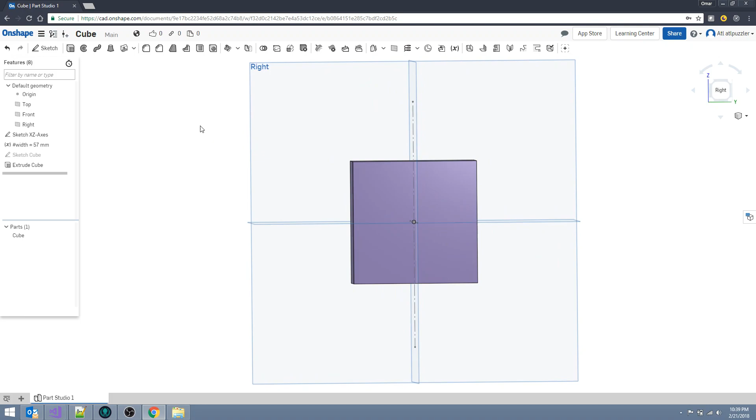In this part, we're going to be designing what's called a slicing profile, a cutting profile basically. We're going to sketch it and turn it into a surface that we can use to divvy up this cube into smaller pieces. It's going to be hard to understand without showing you, so let's dive right into it.

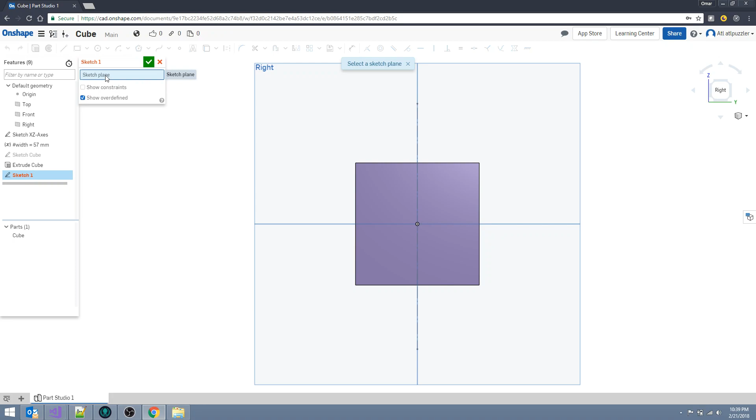So here I'm going to click Sketch, and in the wizard here, Sketch plane, let's choose the right plane. We're going to be sketching here where it says Sketch 1, and I like to edit the name and call it Sketch Cutting Profile.

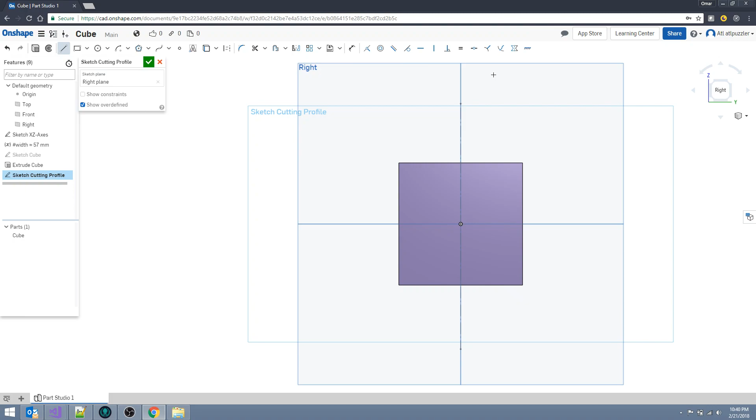To get started, let's click on this icon, the line icon. You can press L. Right around this area to the right of the y-axis, or technically the z-axis, single click and drag down around a few millimeters inside of the cube and click again. Now press escape. So we made one line, one vertical line.

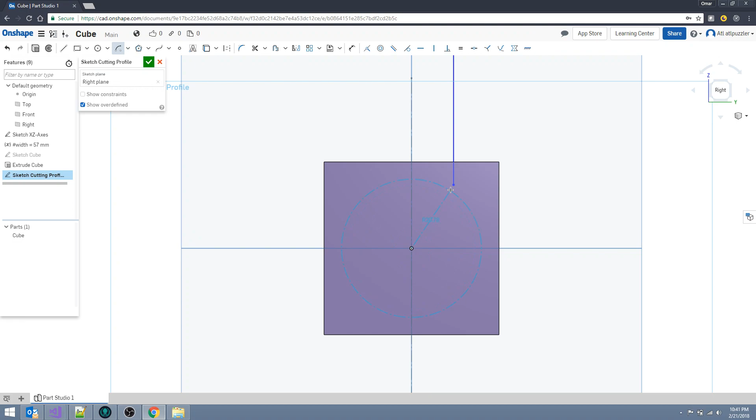The next thing we're going to do is two arcs. We're going to do a total of 3 lines and 3 arcs. Click here at the drop down with the arc icon and make sure you have center point arc. Click in the origin until you see this icon, single click and drag until you attach to this point, single click again, and drag to the right until you have around that much, single click again. Now we have a little arc.

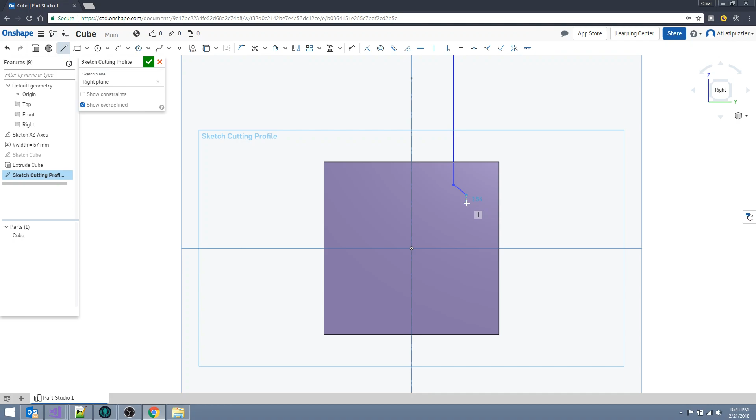Okay, now let's do one more line. Click on the line icon and start from this point here. Single click and drag a small line around a few millimeters, single click again, press escape. I'm going to zoom in here so you can see better.

Let's go back to center point arc. Click at the origin, click at this point, and now let's go back in the opposite direction past that vertical line that we drew in the beginning. So you want to go to the left of this line.

Let's go back to doing a line. Start from this point and draw a vertical line downwards. Make sure it's vertical, click, then press escape. Let's do one more last arc from the origin to this point. We're gonna go all the way to the x-axis, and you should end up with a shape like this.

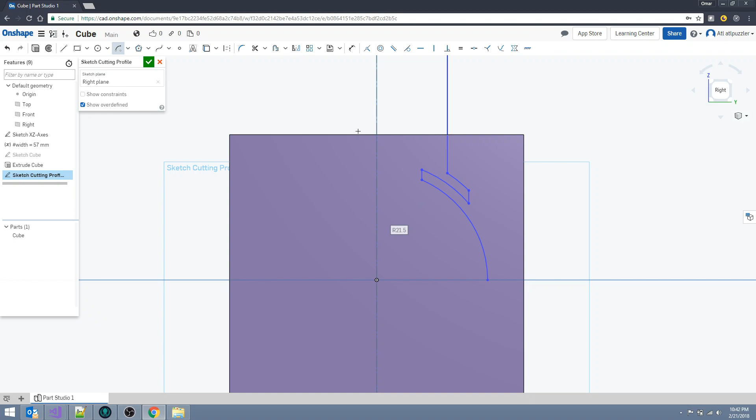Now you might wonder why are we doing this, and what is this shape, and why does it look this way? We're going to clean it up and fix it up, but let me show you why we're doing this. Just for the sake of demo, I'm going to create a new tab here, Part Studio.

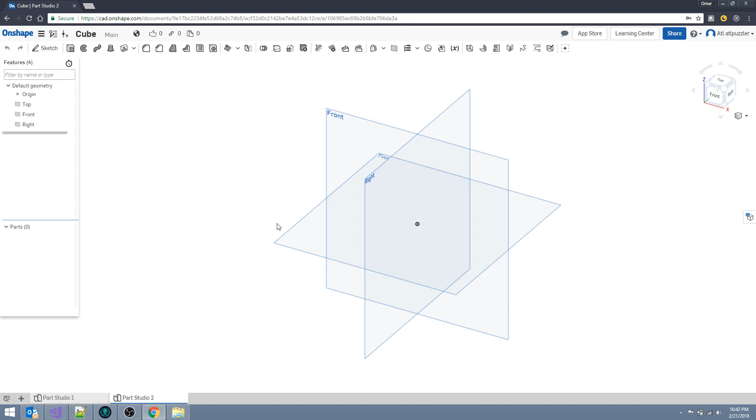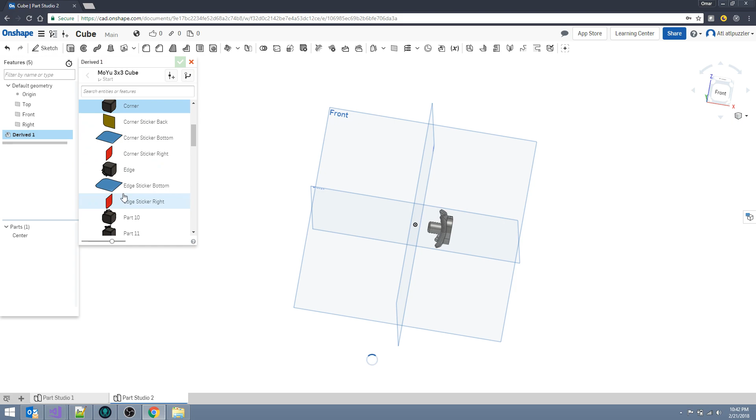This is just a clean area, and I'm going to click the derived icon here to import parts that I already have. This is from my current document where you and I are looking at. I'm going to go to other documents, and choose one of my cubes here, and choose some pieces like a corner and an edge, and click OK.

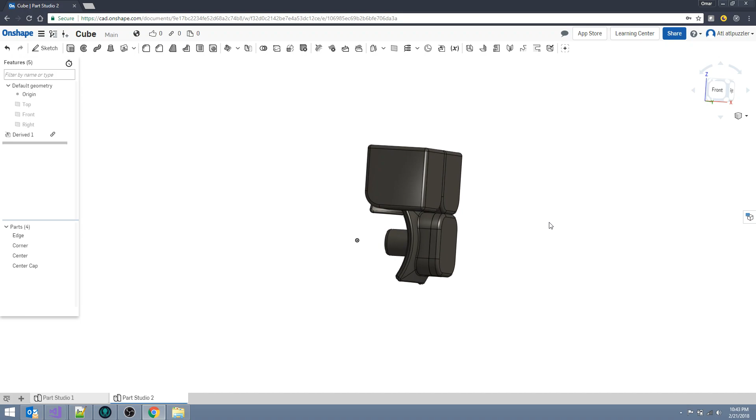Let me go ahead and hide these superfluous planes, and I'm going to zoom in. If you look on this side of the center piece, let me hide these parts here. Okay, and let's rotate this.

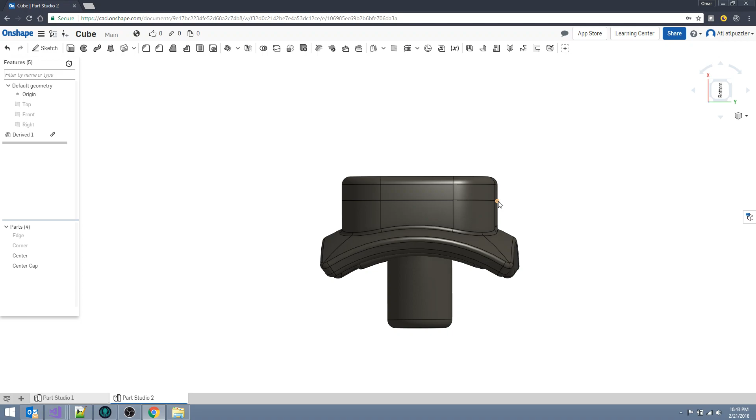If you look at this center piece of the cube, how this is a straight line here, it comes down vertically, and then it sticks out by some distance to the side, and then it goes straight down again, and then it goes back like we did, and then it comes down again, and then it comes back as an arc. So this is what we're trying to design here. This is the cutting profile that we were talking about.

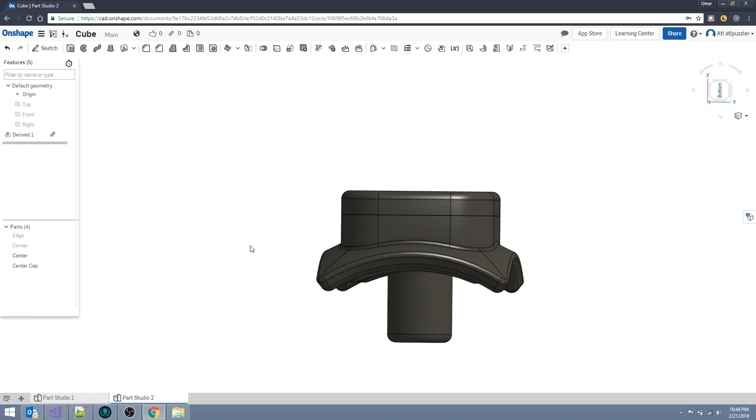So this is why we have a line coming down, and this is what sticks out and goes back to design that particular piece over here. And once you cut it, if you look at the edge and how the edge interlocks with it, it forms this shape called, I think they call it, torpedo.

Let's hide the center here. It looks - and the cap, it's going to look something like this ultimately. But I'm not trying to jump ahead here, so let's go back.

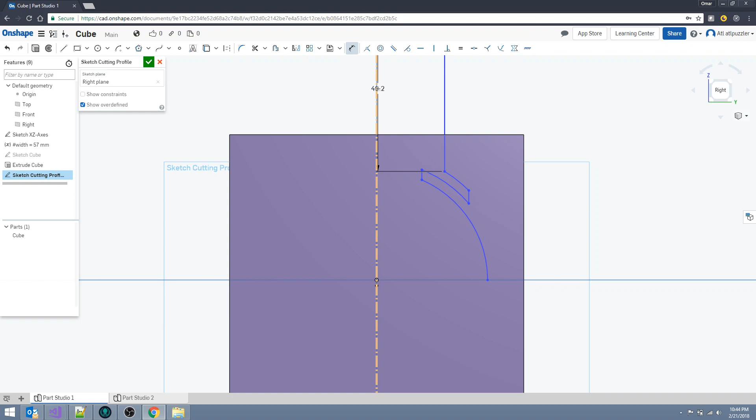Now we want to add some measurements and constraints. Click on this dimension icon, click on this vertical line, then click again on the vertical axes and type.

9.5. Typically I derive these from the width here. It's the sixth of the width because 9.5 is half of the center layer, so this will be 19 millimeters for the cube, for the corner.

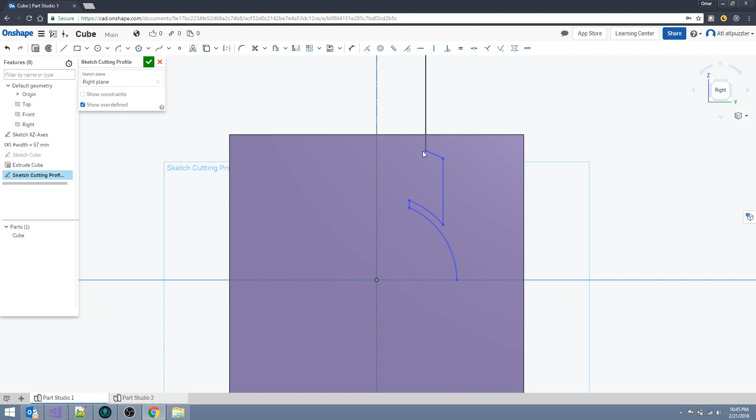Okay, so this is 9.5, and then next drag this point up somewhere around here, and we want to click on the dimension again, select this point, and then click on this edge of the cube.

We want this - depending on how deep you want to cut, it's up to you, it's a matter of taste. Let's make it 5 millimeters, and we can adjust it later. Then click again on this arc.

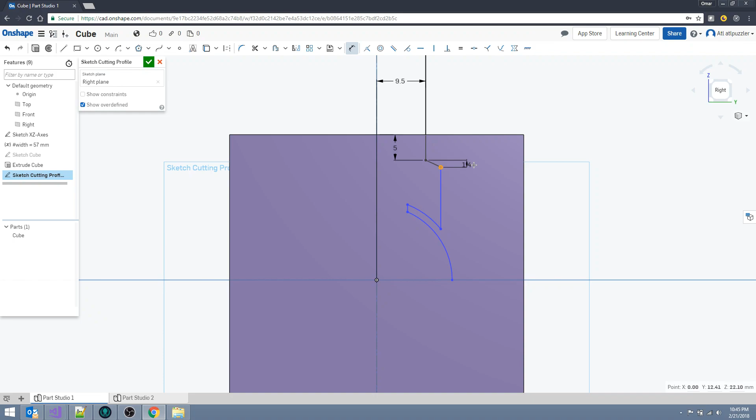Actually, click on this point and then this point, and let's make it 2.5. I think that's enough for an edge.

For this right here, let's make it also 2.5 millimeters thick, maybe actually 2. I like it thin, but it's up to you. You can adjust that to your taste.

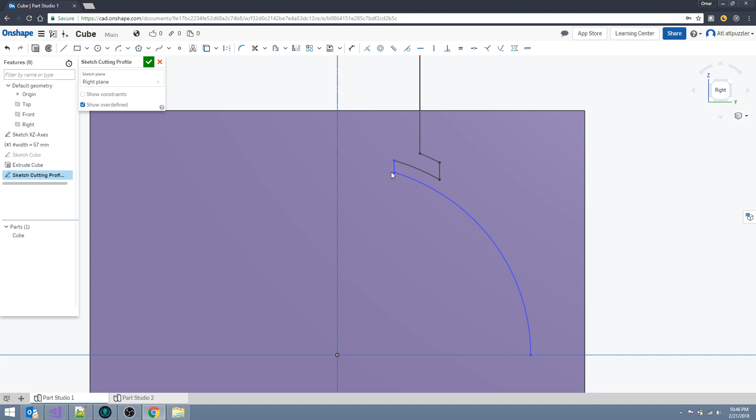Now I'm going to press escape, and I'm going to extend this edge inwards like we talked about, and click on the dimension again, choose these 2 points, and let's make it 5 millimeters.

And then let's dimension this little edge, make it symmetric. We'll make it 2 millimeters, and you can leave this one alone.

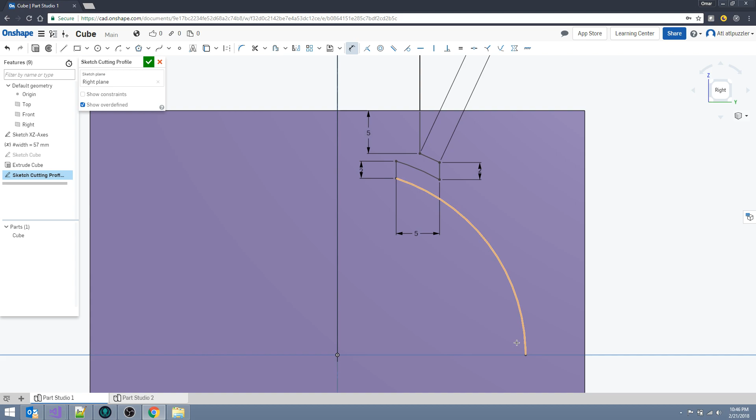So I know it's kind of hard to see with all these lines, but you have a vertical line that sticks out, comes down, and goes down again. Let's do OK. And now you have that sketch ready to be used.

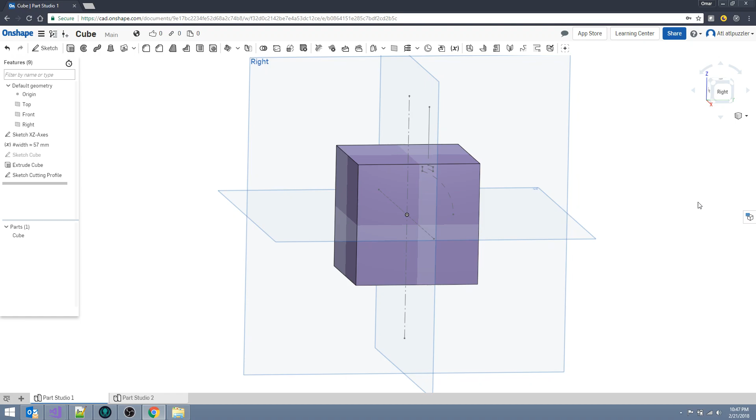Okay, the next step would be to revolve the sketch, and what that means, we're going to take these lines and spin them around. Sorry, let's go to the front here.

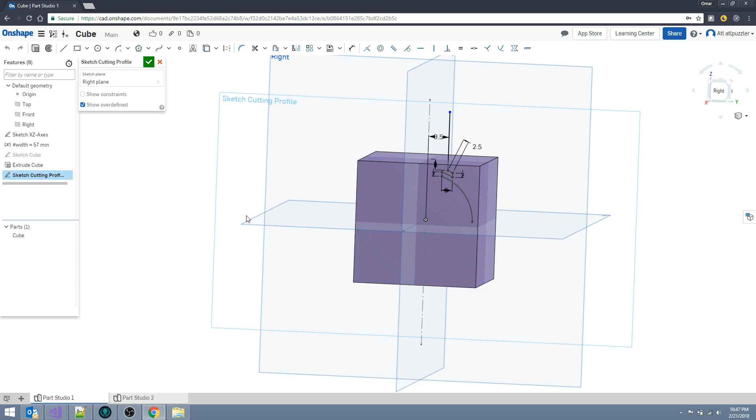Actually, I drew it in the right layer. Okay, no problem. We're going to revolve this sketch around the horizontal axis. Let me zoom in again and click on this line icon and on the construction line.

Construction line means it's not going to be part of the design. Click on the center and drag this line here and press escape. This way we have a line to revolve around.

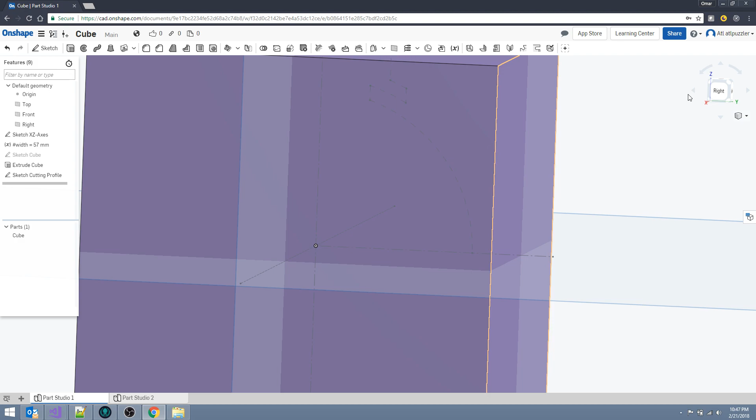Click OK and zoom in again. Okay, so now we're going to click on this icon that says revolve, and make sure you do surface, because we want to make an infinitely thin surface.

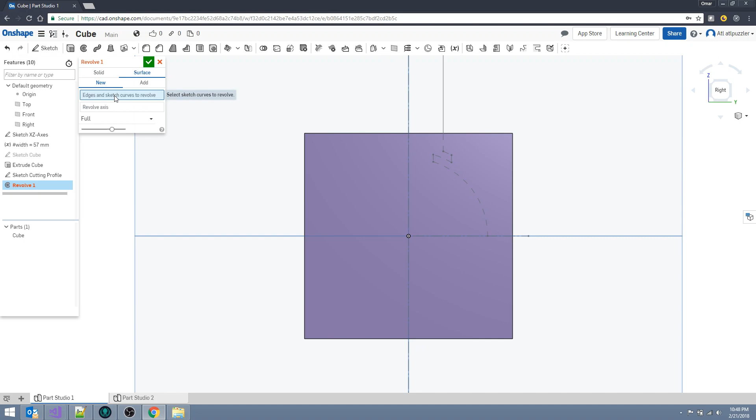It just has an area, it doesn't have a volume. Click on this blue area here to choose a sketch, and just click on your sketch here. And the revolve axis, I'm going to click on this line here and then press OK.

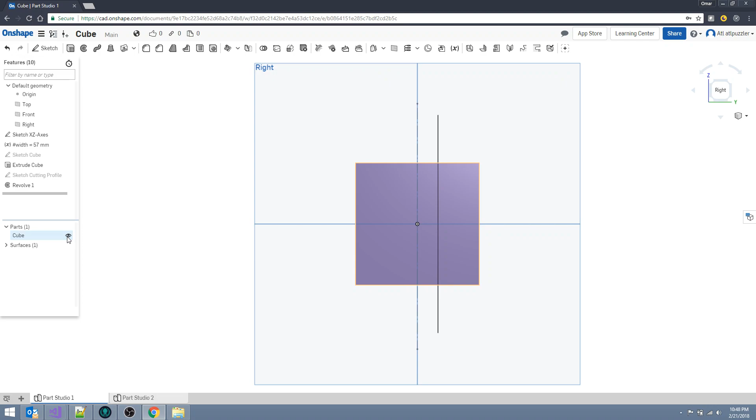It seems like nothing happened, but actually if you look around now, we have a surface that we generated from our sketch. I'm going to go ahead and hide the cube to give you a better idea of the surface. Let me hide the axes.

And it looks like a UFO basically. And if you look at it in a cross section, it's basically the vertical line that we drew that sticks out, goes back in, and then has an arc.

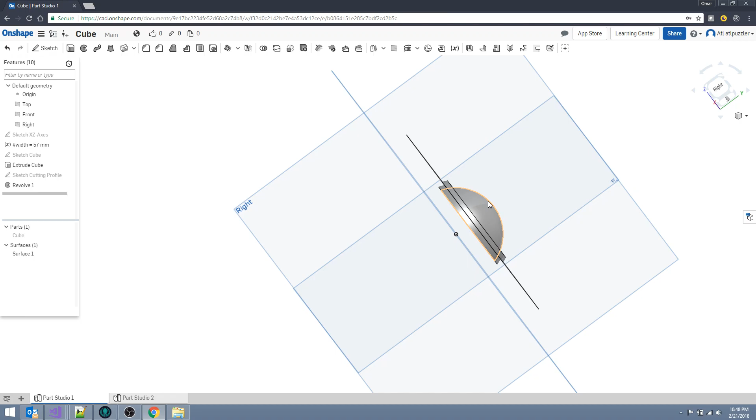And we're going to use this surface to slice up our cube into smaller pieces. Okay, I'll just go ahead and rename this to slicing surface 1 because we're going to make more, and do OK.

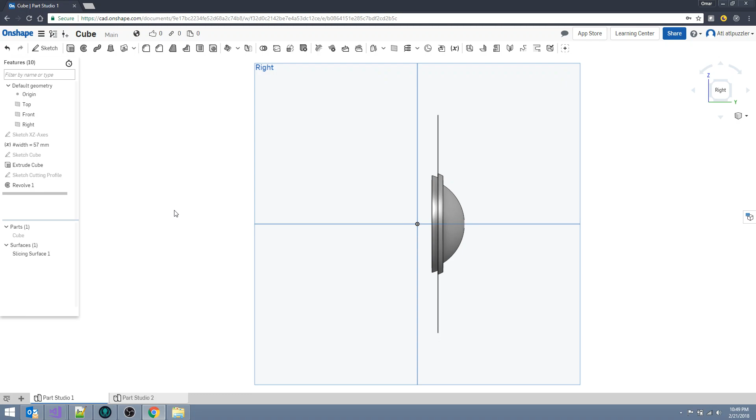I'm going to go ahead and stop the video here. I'll give you a chance to actually do the sketch, review it, spend some time to make sure you get it right, and revolve this. In the next part we'll start cutting up the cube with the surface. Let me know if you have any questions, and have a good day.